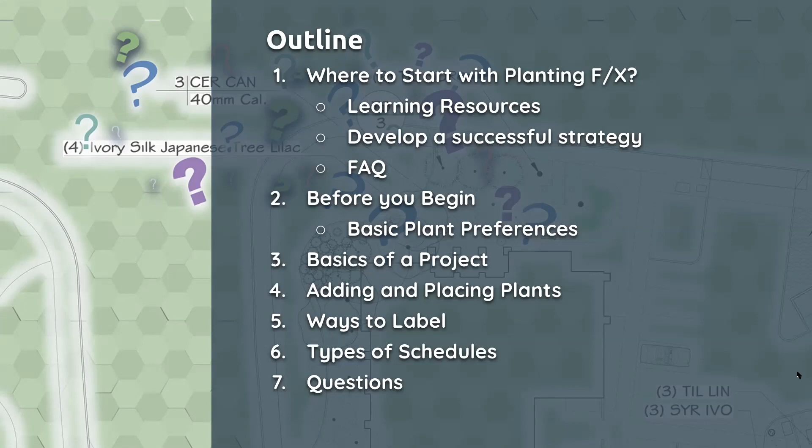So starting with how to learn more. I usually end my training sessions with this how-to-learn list, but today we're going to start with it instead. The best tool you have is knowing how to learn more than I can possibly tell you in an hour and a bit that we're going to be spending today. So the first one is webinars like this one. You might have gotten to hear this live through the Zoom link, but if you're looking for other webinars, you would go on our website.

Up at the top right, you'll see Resources, Videos, Webinars, and that will bring you to this page where at the top you can see the next live webinar you can register for and check what date that's going to happen. But you can also see all of the recordings down here.

You can filter by topic, like planting, as I have over here. You can also search for different things, like tree remediation, and it will pop up with this webinar.

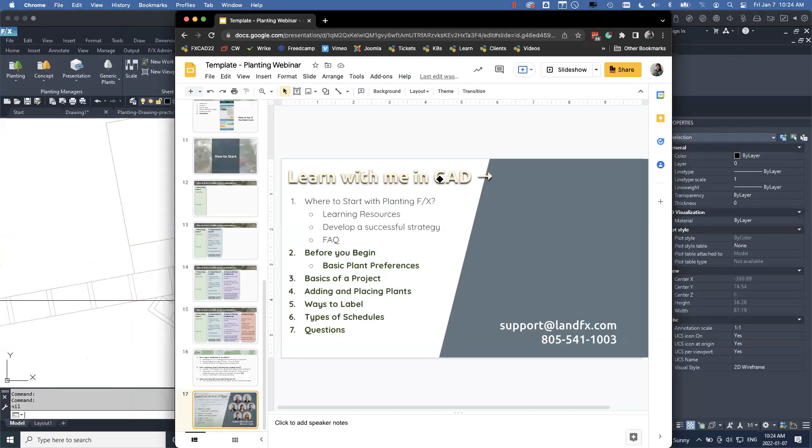So if I just go out of here and go to our website — here's our homepage, landfx.com. If I go to Resources, Videos, Webinars, here we go, and I go over to AutoCAD and FXCAD.

I can see right here, I have CAD for Beginners 1, 2, and 3. If you've never touched AutoCAD, start here. If you have some experience in AutoCAD, maybe go through those liner notes that Jason types up and see where you probably should start in this series. But it never hurts to start from one and relearn your bad habits into good habits.

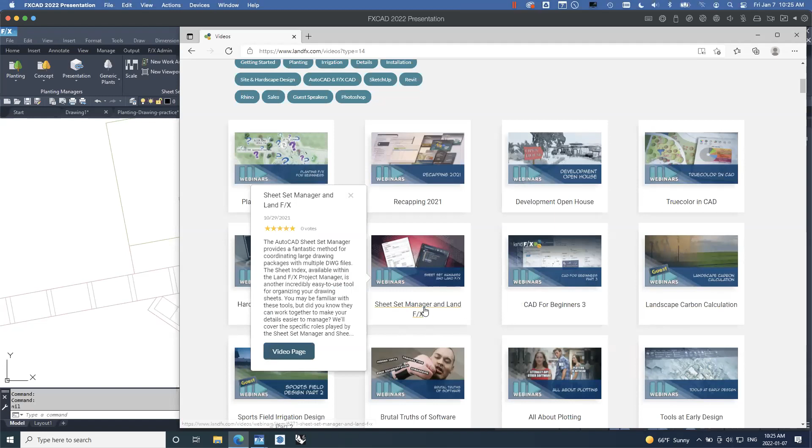Another one I really like — we've got the all about plotting here, as well as drawing setup using an image. A lot of people ask how do I use a Google Earth image or a PDF — this is where you want to go. Also, one of our recent webinars was the Sheet Set Manager and Land F/X. If you're watching this later, you can always search in here for Sheet Set Manager.

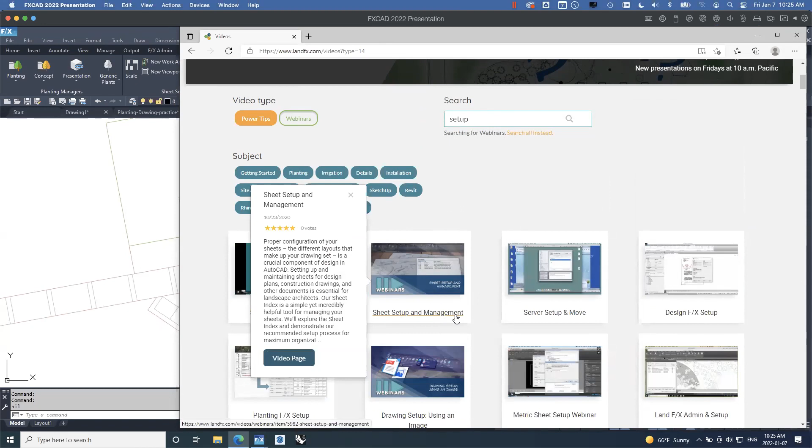This is Sheet Set Manager, but I actually like, if I go to Setup and search Setup, this sheet setup and management is an easier method of just setting up a title block and the drawing setup that I'm using today without going into the more advanced Sheet Set Manager. So I would actually watch this first before the Sheet Set Manager if you're new to this.

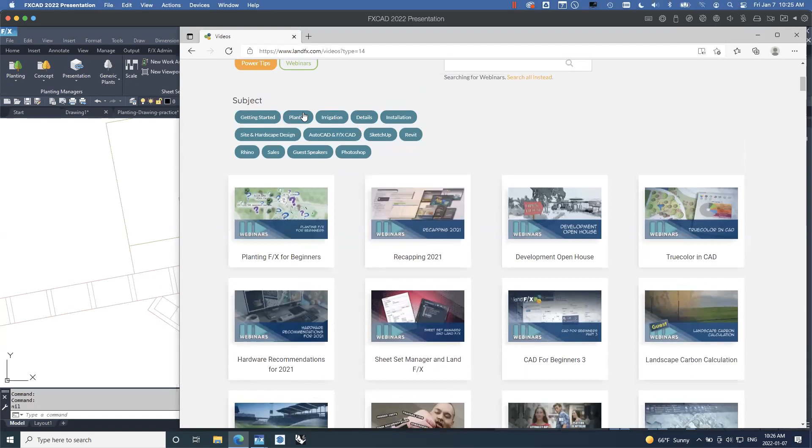The last one I really like, if I just go back to webinars, is just webinars. It was migrating existing plan into Land F/X. Actually, I think it was under planting. There it is, migrate an existing plan into Land F/X. So this is one method if you kind of want to start with a drawing that already has a lot of blocks in it, that you're halfway through or you're redoing an old plan. This is the method that you're going to want to follow. It's going to be really quick and you can replace all those old blocks with smart blocks.

But instead today, we are going to just be starting from scratch. Just a blank drawing, no plants placed at all. So kind of like the workflow you'd be doing for a new project and setting up your preferences on the go. So that's what we're doing.

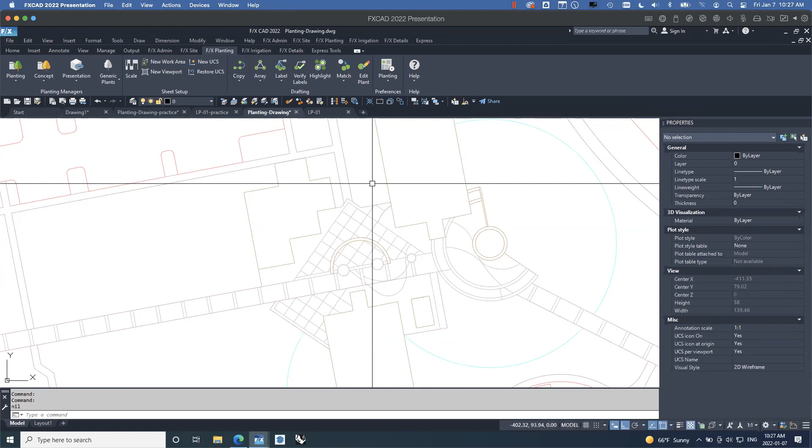Segue into CAD. So let's look at our ribbons. If you've installed Land F/X and Planting F/X correctly, you're going to be seeing all these ribbons. If you just have Planting F/X, you don't need this Irrigation F/X ribbon. If you have Irrigation F/X as a license type, it does include the planting tools as well. So you will have all of these and that will be fine.

We are going to start over here on the F/X Admin ribbon, and we're going to be looking at our preferences. So our preferences are actually in two places. They're over here, planting preferences and plant size preferences. And we also have them over here on the F/X Planting ribbon. If I drop down over here, I have planting preferences and plant sizes preferences.

I also have save plant blocks. So that's kind of a little heads up that yes, you can save your own plant blocks. But I'm going to be focusing on this one. Let's go to planting preferences. If you're brand new to Planting F/X, this is where you're going to want to open up first. And we are going to set a few, change a few defaults to your preferred style, even before you start a project.

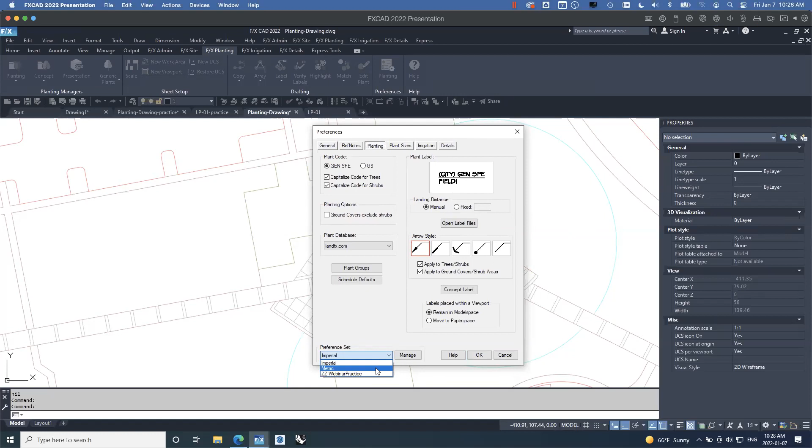First, you need to choose between imperial or metric. I have one over here where I was kind of practicing for this webinar, but if you've installed from scratch, you will just see imperial and metric down here right now. We are going to be improving this, but as of today, this is how it looks. And you need to choose between them. Today, I'm going to be doing a metric drawing, but everything that I'm going to be doing today is easily done in imperial inches, architectural inches, or decimal feet, no problem. You would choose imperial. I'm going to choose metric.

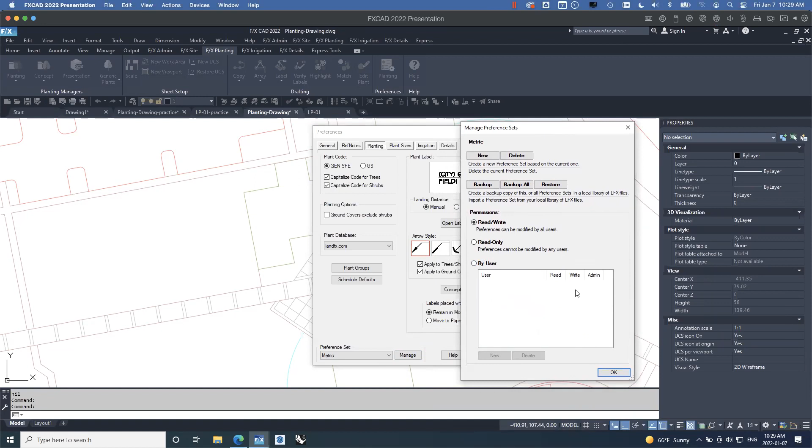And before I start changing things, I actually want to do something a little bit awesome. I'm going to click manage. You can see the manage preference set. You can see where I can set things by user with admin permissions to change things if you need to. Be careful with that. Do try and set 2 admins just in case somebody's computer blows up. It's set to the computer, but I'm actually going to just click new on here. And what this is going to do is make a complete copy of this preference set under a new name.

And I'm going to name this as 00 so that it falls alphabetically first in the list. And then I am going to set this to your company name, maybe a short form of the company name, and preferences, keeping it kind of short. So maybe AMLA, Amanda Marin, LA. I like that name. Yep. Good morning, landscape architecture. And then I'm going to put prefs. There we go. Nice and short, to the point. Okay, this is my office's personalized, customized preference set now. And it pops up at the top of the list, so all new Land F/X projects are going to use it by default.

Now that I'm in here, I can start changing things. So the first thing I want to look at is plant code. I need to decide between 6 letters and 2 letters.

Really, it's personal preference. I can make a strong suggestion that you change your standard to 6 letters. I started in an office that did 2 to 3 letters for all of their plants, and when I moved them over to 6 letters when we started with Land F/X, oh man, did the city officials and contractors all say your plans are so easy to read. Because if it says ACE as the first 3 letters and it's pointing at a tree, it's a pretty big indicator it's an ACER. So it just meant less relying on flipping back and forth between the schedule and the plan for people trying to read it. That's the benefit of that.

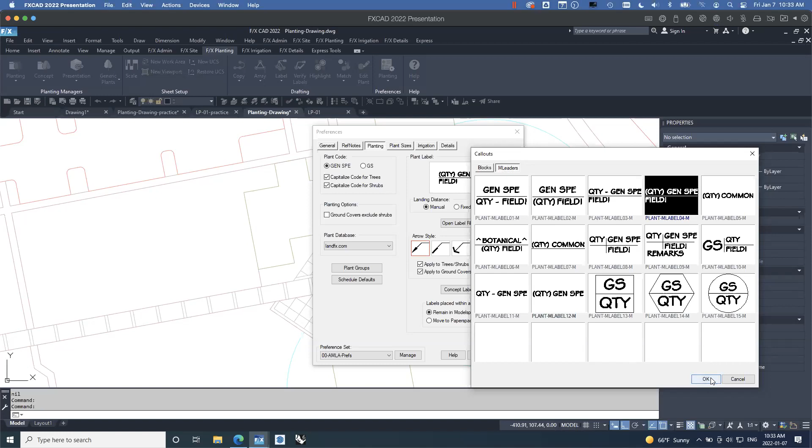You need to pick a landing distance. This is just if you click and label a plant, whether it's a fixed landing distance between the second point and the actual label, or if you manually pull it across. See what I mean? I prefer manual myself. You can choose an arrow style, whatever suits your fancy.

Concept label, honestly, I would edit that when you get into concept plans. You do want to have a look at these plant groups. I can open that up and see right here I have trees, and then it breaks it down into types of trees - these are like subcategories. We call them plant groups, and mostly it's a way for you to eventually filter your plants so that they separate themselves in a schedule. You'll see what I mean. There are different plant groups for each category of plant. You're going to see these categories around a lot. They are suggestions, so you want to go through all of these and maybe change them now. You can definitely change them and adjust them later as well. I'm going to say okay.

Leave schedule defaults until after you've done your first schedule, and basically everything else in here should be fine. You might want to choose between remaining in model space and paper space - that's just for labels. If you're doing our recommended method where I have my planting drawing in model space and my sheet in another drawing, you can't label through an XREF, so you will have to remain in model space and label here in the model space drawing. Keep that in mind.

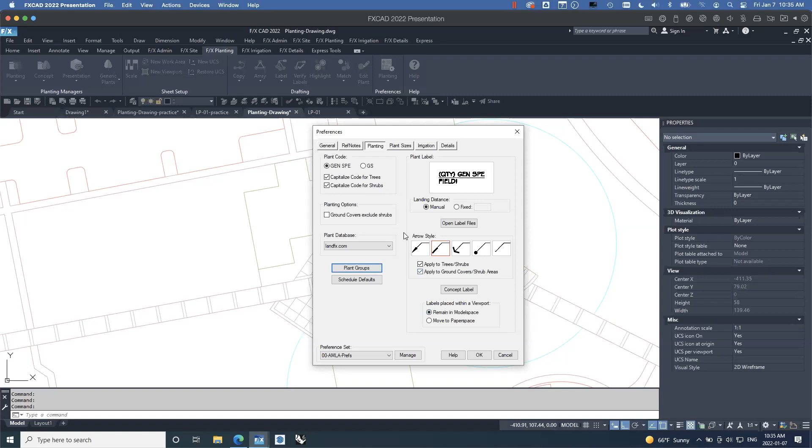Okay, next I want to go to plant sizes. Again, you can see trees, shrubs, shrub areas, ground covers - this is a common theme. Under here are the different available fields for when we assign data to plants, what kind of information we can assign to plants. You do want to go through these at the beginning and set them to how you want them. These are all completely editable. You don't need to stick with what we've put here as default. You can change container type to whatever you want.

You can also delete or add different entries in these. If I click down to this radio button, I can see all the different container types I have here. You can edit, delete, and add new ones. You can also add another column for even more information than we have by default, and this just leaves the door open for whatever you want.

I've seen people—one person recently asked if they could put weight in here because they do a lot of plans on rooftops. I've seen people use this for WUCOLS in California, which is a water use standard. I've seen fields for diameter at breast height, DBH, all of that.

So as you go through here, you'll notice, if I add that in and click new and say, oh, this tree is going to be 500 pounds at mature weight—if I click through to shrubs, I don't have that weight category. So you will need to drop down and add the category to each one of these because they're all different.

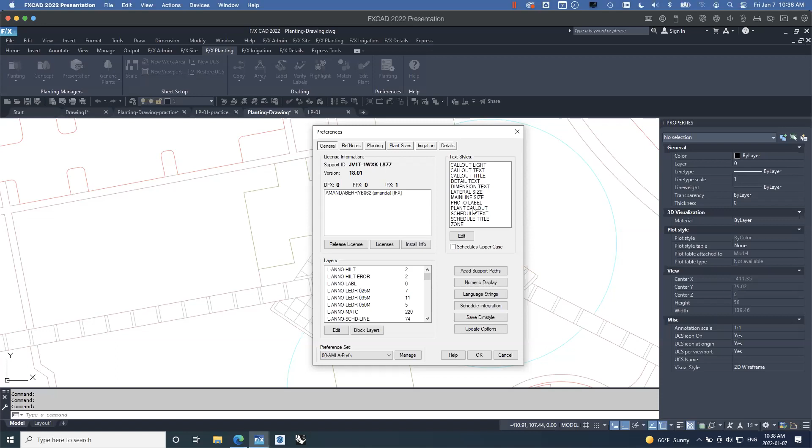The last thing we want to look at for preferences to set up is here in the general section. First, you want to go through and make sure the text styles match your font and size. So say if I go to plant callout, we're going to be using that a lot today, and edit it.

It's just going to ask for a scale. I'm going to set it to 1 to 100 for now, because I know that's what my plan is going to be. But if you're in a blank drawing, it won't matter what scale you set this to if you're just setting up preferences in a blank drawing.

By default, this is Stylus ITC Bold, which is a version of Stylus BT that is bold. But you can change this to Swiss 721. You can change it to Arial, whatever you want to use in your office.

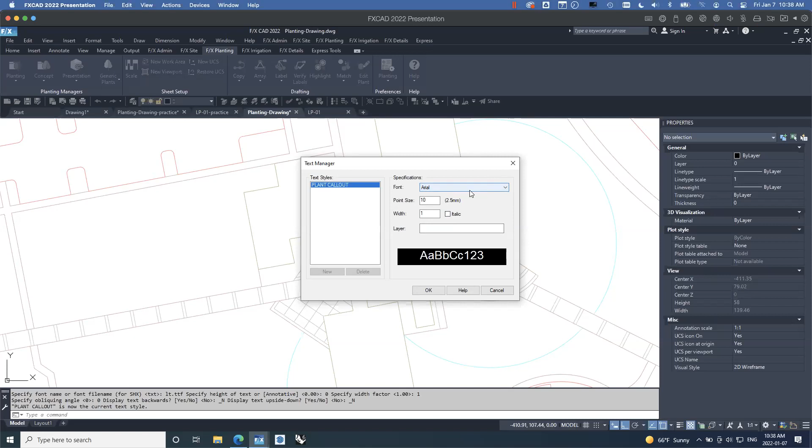Note of caution against using fonts that are not installed by default with AutoCAD, Windows, or Land F/X. There can be problems installing fonts and them actually getting background names different between two different computers. It could cause a problem in here. Be aware of that if you're having font issues with Land F/X. But Arial's a pretty safe choice.

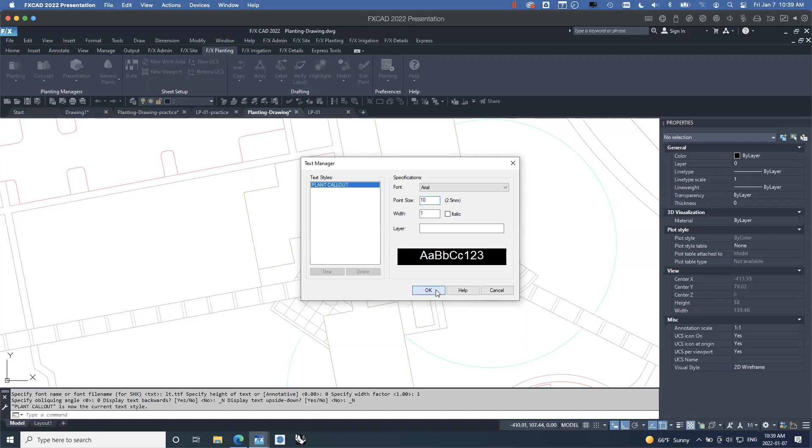Point size relates to, like in a Word document, how big it actually is. 10 is the default—please try not going below 8-point font, it becomes illegible. Okay, I'm going to stick with that. I've set my plant callouts to Arial.

You can go through all of these text styles and make sure the font's the right size. The next one you're going to want to go through is layers. I'm not going to go through how to do them exactly in here—it's a whole other webinar, and we have a great guide on our documentation on how to do it.

Keep in mind, this is for matching our layer colors and names to your standards—you need to edit them here in the layers list and also in the block layers list. The difference between the two is everything in the layers list is created on the fly by Land F/X. There are two ways Land F/X creates layers: on the fly, in which case it needs the layer name and the color, or by importing a block where the layer is already set up with a name and a color. In that case, you just have to change the color from one to the other. So that's it in a nutshell. If you need to change to match your office CTB, follow the guide, the whole worksheet for that.

Last thing you probably want to change is numeric display—that's just to change it to the units in your area. I'm going to leave it all as default for now, though, and I'm going to say OK.

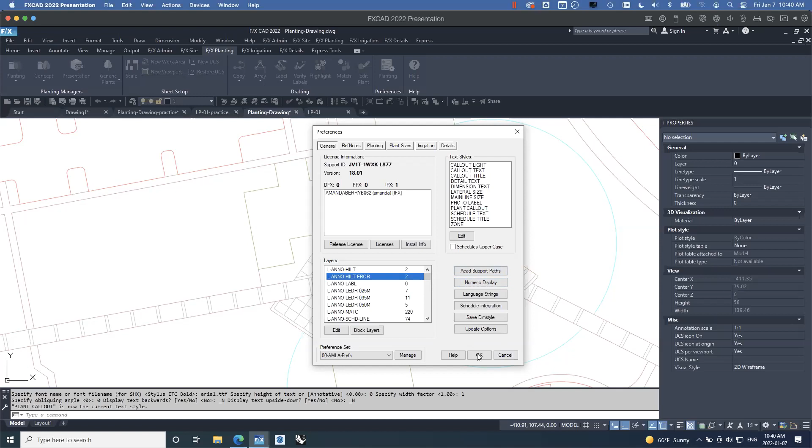Okay, so those are the main things you want to change at the beginning, and the rest we can kind of do on the fly. Let's see where I'm at.

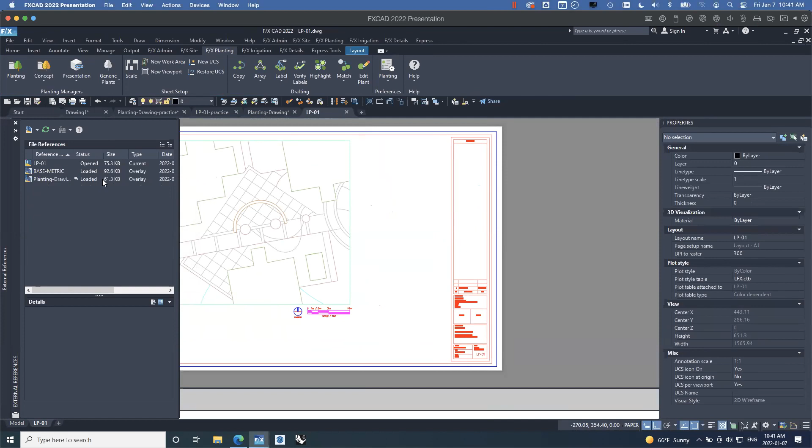Okay, so I've got my CAD plan set up here that I'm going to show you guys with. I've got an XREF on an XREF layer to my base file. I've got a planting drawing with my model space set up here, and I've got that XREF'd in. If I open up my XREF manager, there we go, I can see in this sheet I have my base file and my planting file both XREF'd in as overlays in here.

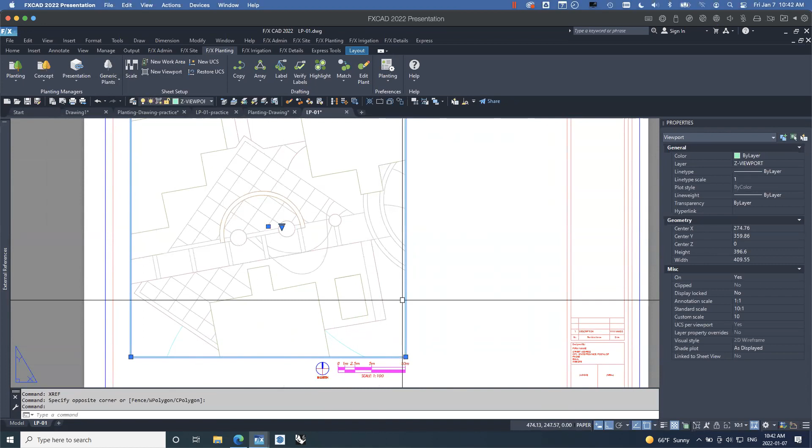And I've already figured out what scale this area where I'm doing my initial planting design is going to be. I personally used, to figure out the scale, our plot scale tool. I have a power tip that shows you how to use that, where you double click inside here, run the plot scale tool, and it will quickly size your viewport for you, and then you can lock it.

So I figured out my scale is going to be 1 to 100 for metric. I think that's around 1 inch equals 20 feet or 1 inch equals 10 feet, somewhere around there for imperial. And so with all of that set up, I need to go back to my workspace drawing.

And do the very first step I do for any LandFX plan, go to F/X Admin and to project list. And that opens up my project list. For you, if this is the first time you're doing this, this is going to be blank. There's going to be nothing in here. I just have a whole bunch from my trainings and other webinars already set up in here. So with yours being blank, you of course will have to click new to make a new project. The rule with projects is you have to make a new project for every design.

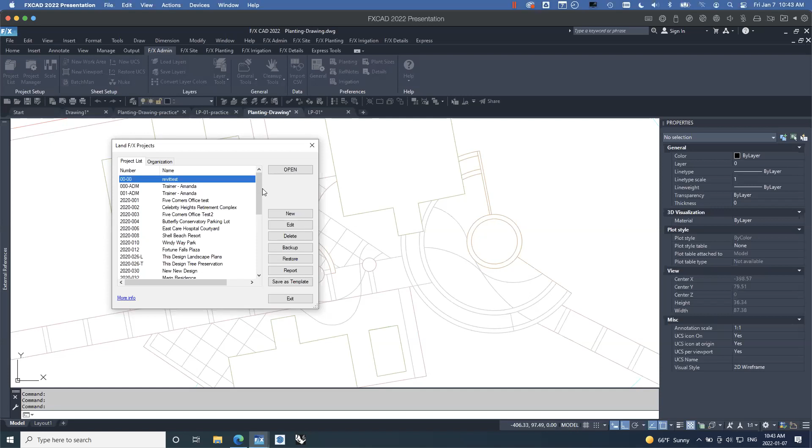You can use the same project between multiple DWG files of the same site design or planting design for the same client, but you need a different project for each new design. You can copy the plants between them, that's fine, but you want them to be copies so that you can edit the plant details in one design and it won't affect the plant details in the past design. That's very important. But I'm going to click new, and we're going to set up a project.

You need a project number and you need a project name. If you already number your design projects, maybe in your invoices, use that number right here. If you don't number them, here's a suggestion: I like using the current year and then just a counting up system. I like to start with 002, and then I go up by 2s so that I can shoehorn in a project that relates later on if I want to.

For name, I like putting in the address, so 777 SLO Road, and maybe the client, Marin. Short and to the point. I'm going to give you some advice on setting yourself up for success with LandFX and creating good habits early on. And I'm going to tell you to set a detail folder right now, even though we are not covering details in this webinar.

I'm going to click browse and just get you in the habit of this. I'm going to go to projects for a project specific detail folder. You have an option of how to organize this. We have a webinar and a power tip on suggestions. Just for now, hey, let's make a 2022 folder.

You can click new and say I'm creating a 2023 folder for next year. I'm just going to call it 2023 and code 2023, and that creates a folder. Whoops, it created it in there - that was a mistake. I need to actually highlight the projects folder and click new. There we go, 2023. You can learn through my mistakes mid-webinar. There we go, that creates a top level folder like that.

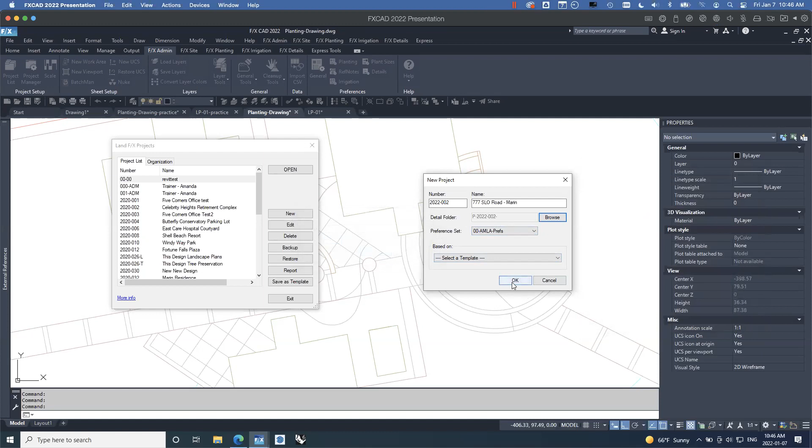That opens up the project manager, basically confirming all the details that I just created for that project, and we're good to go. I can click OK on this.

You can actually follow along with this even in a blank file if you want to. You don't have to have this XREF set up for the rest of this. So the first thing I want to do after I've done my project, and before I place any plants, is...

I want to set my scale. So like I said, I already figured it out. I set up a layout space, I figured out how big my viewport was going to be scale wise. I need to set that as a scale here in LandFX as a plot scale.

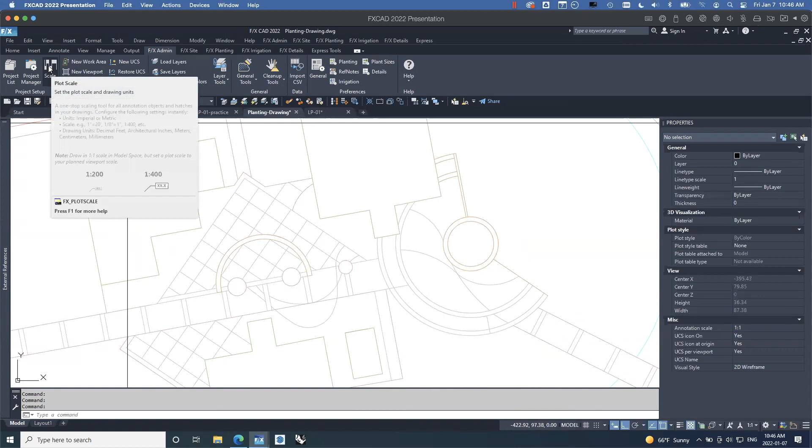LandFX uses this plot scale in order to figure out how big that plant callout text should be. So we told it to be 10-point font. It needs to know what scale it's at, so it knows how big 10-point font is going to be in model space or in paper space. That's essentially what it's doing.

So again, you can click imperial and do a decimal feet or architectural inches scale. Again, we're going to be doing metric, and I already know that my viewport is 1 to 100. And my drawing units in this model space are meters. That's all very important.

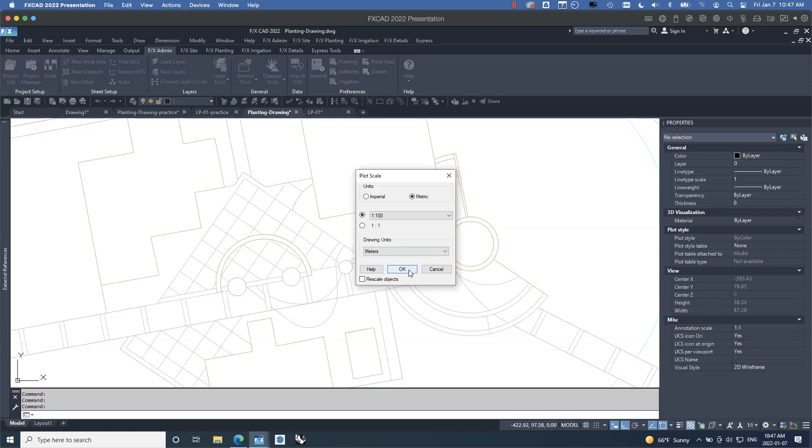So step 1, create a project. Step 2, set the scale. Step 3, add a plant.

Let's go over here to F/X Planting again, this ribbon up here. I'm going to go all the way over here to the left-hand side. I can drop this down or just click on it. The very first option is going to be the plant manager. That's what we're after.

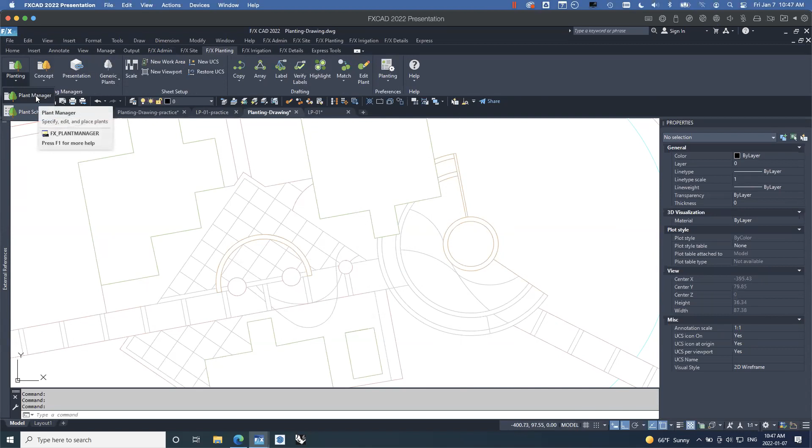That opens up this nice little handy window. You can again see the categories: trees, shrubs, shrubberies, and ground covers. These are suggestions, not rules. You can put a tree species in shrub areas, whatever you want. Just manage your plant groups accordingly.

I'm going to click new to just add a plant real quick. Our first plant. So this is what your window is going to look like right out of the box. You can see a lot of options going over here on how to find things.

We have 43,000 and counting. We're probably up to 44 now. And basically I can search through this. Let's go ahead and search maybe Pinus. That search is going to bring me right to pines.

Now I have a lot in here. Maybe I want to filter by my area, so I can go to filters. And I can filter by a hardiness zone, 8A or 8B maybe, and it's telling me how many plants there are in our system that match that filter. I can apply filters.

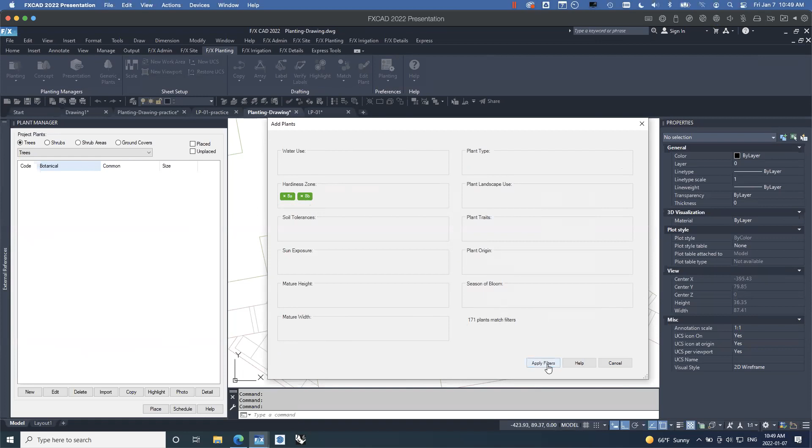And there we go, here are all the pines that match that filter. So I'm going to go to... let's see, I'm going to go to nigra, maybe. And these are all the Austrian pines that match that. So let's go with Oregon. Teardrop sounds good. I'm going to add that to the project, and that gets added to the project.

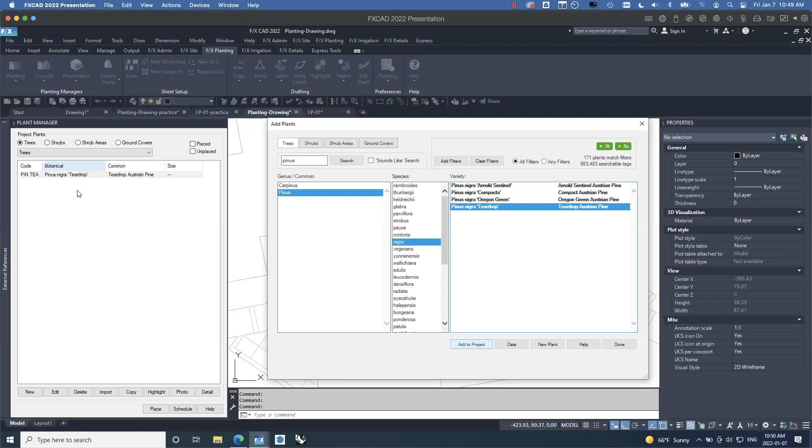Now I can keep going here, keep searching for all of my trees and keep adding them in, and they get added into this plant manager. I can also clear my filters, clear my search, delete, and go over to shrub areas. You see that switching over the plant manager too. Clear the filters.

And let's search for a bottle brush plant. Oh, not V. C-A-L-L, I think. I'm even just doing C-A-L-L, and it kind of brings me down to all the C-A-L-L genus and common names, and I can pick out the one that I wanted.

I wanted citrinus. There we go. And I wanted the Endeavor citrinus. So you can see we have a lot of different varieties going on in here, and basically everything in here has been suggested by a landscape architect at some point who was using our software.

And if they don't see the variety that they're looking for, you can add new plant, and you can go ahead and add your very own variety in here. So Amanda, the Amanda variety, this is the Amanda bottle brush. I'm going to say okay.

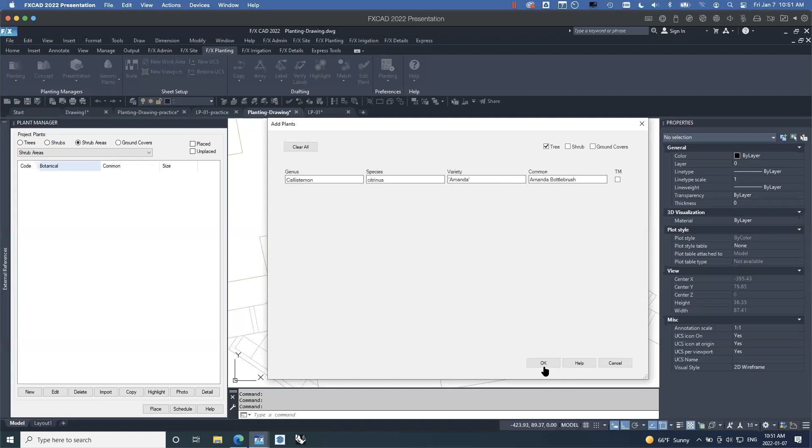And that will filter back to it. You can see that it's added that for me right away for me to add to my project. There we go, it's added to the project. But what that also does is it just pings us, and somebody in our team goes through and makes sure that's a real plant and then adds it to this whole list for everybody else. So Molly's going to look at this, and she gets so many of these plants from me during all my trainings, she's immediately going to throw it in the trash because it's not a real plant.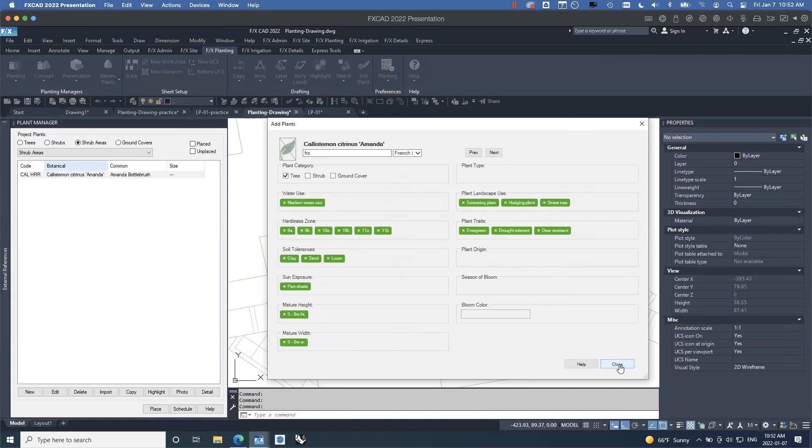But while you do that, I do recommend clicking this data button and going ahead and refining this data, maybe adding a photo as you go. So we are kind of wiki-basing our data to quickly fill out all of these filters for all of these plants. You get badges for doing more of them.

I'm just going to close this and say done and kind of go with this for now. Okay, so we have added our plants. Now we've got to edit these plants. So if I edit this Amanda bottle brush and click edit in the plant manager, all of this information at this point is still editable. So if I want to completely change the botanical and common name and code at this point, different than it is in the master project list, you can do that here.

And then you can import all of this information you set up using this button into future projects as copies. It's great, so I can go ahead and set up everything here as if I'm going to use this plant again in the future as well. So maybe this bottle brush is about 25 bucks to supply in place. It's a 2-gallon pot. Again, I don't have that third column here because I didn't set it up in my preferences for shrub areas, I only did it for trees.

I can set a spacing for my shrub areas. Maybe for this one, I'll put in 700 millimeters, which is a little over 2 to 3 feet. And then I want to set a symbol, so I'm going to click on this symbol. I have all of these options for line types for a shrub area.

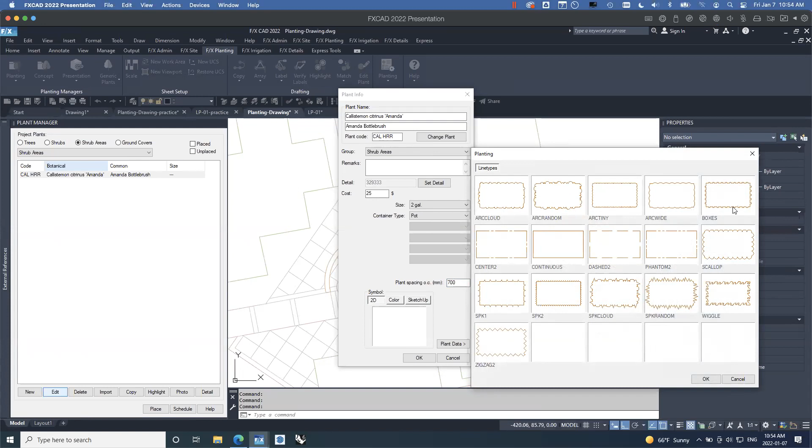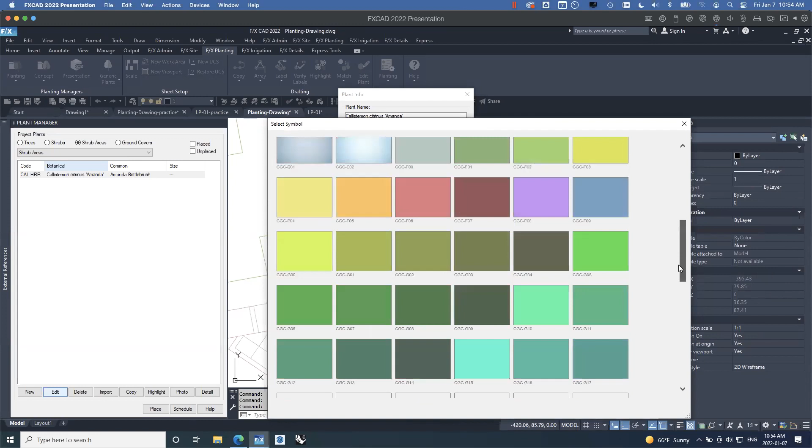I'm going to choose this one. And then it goes over to hatches because this is an area that it's calculating the spacing of these plants. So I can click on that hatch, there's lots available. I can set up a color right away, so let's go with a nice green color. I can do a gradient or I can do a solid. And then it's going to ask me for that hatch again, I can change the hatch here too. But that's basically this plant setup.

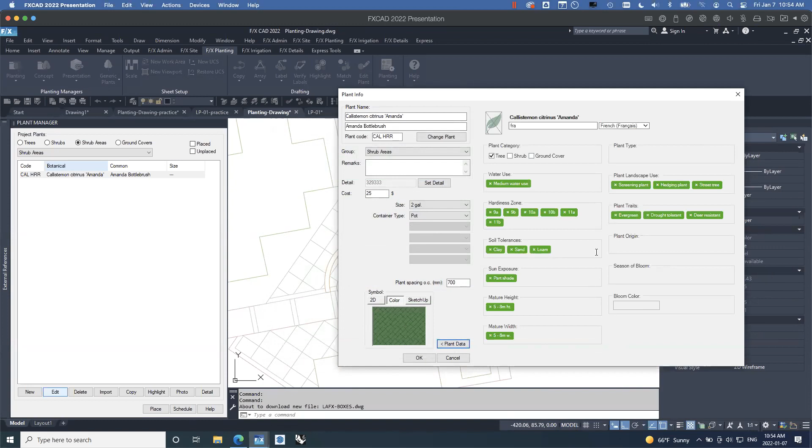I can also have a look at the plant data at this point. These are all really handy additional data points beyond the fields that you can also include in the schedule later on. I'm going to say okay, and that's set up. Let's do that again for the tree.

And you can see how it's different, so I can edit that one. Again, all editable - maybe this one's 350. You can see that additional field that I set up here. I'm going to say this one's maybe 150 centimeter height, that is about 5 feet.

Container type, maybe this one is a wire basket or bare root, and I can choose that weight, or I can click add new and say this one's going to be 650 pounds. There we go, that one's added. It also adds it to the standards as well, if you are allowed to edit the preferences.

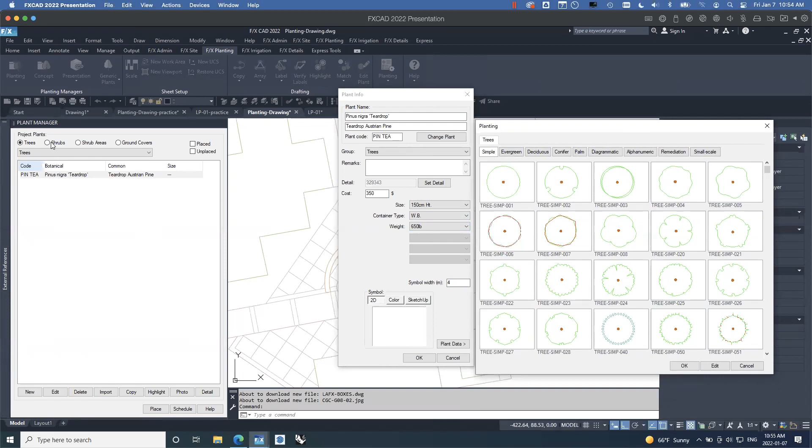I can change the symbol width of the pine. Maybe 6 meters is quite big for a pine, probably it's going to be more like 4 meters or 12 feet. Symbol, I click on this, I get a whole bunch of different symbols. The symbols are different between trees and shrubs. They're the same between shrub areas and ground covers, it's just ground covers you don't choose that outline.

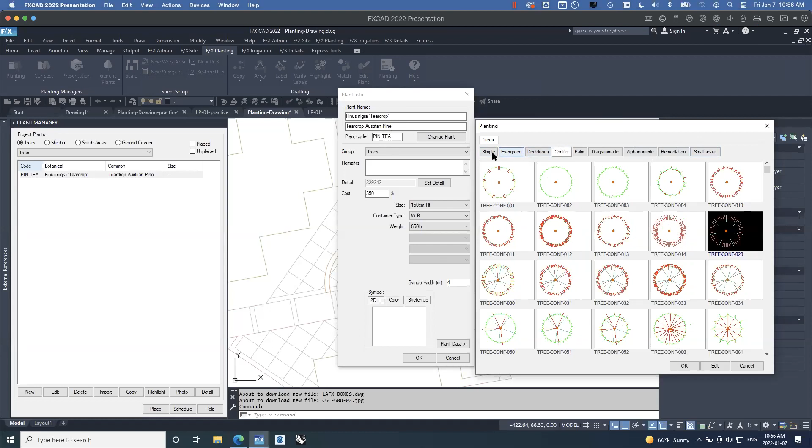So for trees, I have lots of options to choose from: evergreen, deciduous. Obviously for a pine, I'm probably going to go conifer, maybe I go for something like this. You are not limited by these, you're not even limited by these folders. You can add your own company folder to the beginning here if you want to bring everybody to that. So I just set that, set a color symbol - again, different color symbols, you can see it all downloading right now.

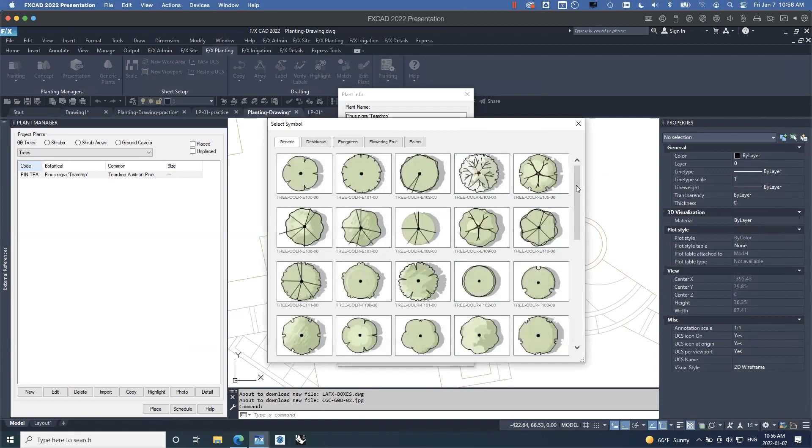There we go. I'm going to go to evergreen, just improve this to sort it a little bit more. Maybe I'll go with that color. Great, I'm going to leave it at that. That gives you a good idea of the difference between the two.

Now we're going to go to placing. So I'm going to grab this one. I'm going to place. And we are going to go a little bit beyond an hour today. We did plan on that.

So as I'm placing it, I can just kind of click, or I can place 3 or 7 or 10 all at once. And I can cycle between all the different versions, patterns of 10. I can make this wider. I can make it smaller. I can make it dance.

And you're probably wondering what I'm doing. Basically, when in doubt on any Land F/X command, you want to look at the command line—it's telling you what to do. It's saying choose a position or tap K to look at your shortcut keyboard commands. So I tapped K, and you can see what I was doing. I was tapping the 3 key, then the 7 key, then the 0 key for 10, and I kept tapping 0 to get all those different patterns. I tapped W for wider spacing, S for smaller spacing. I have a lot of other controls in here that you can play around with.

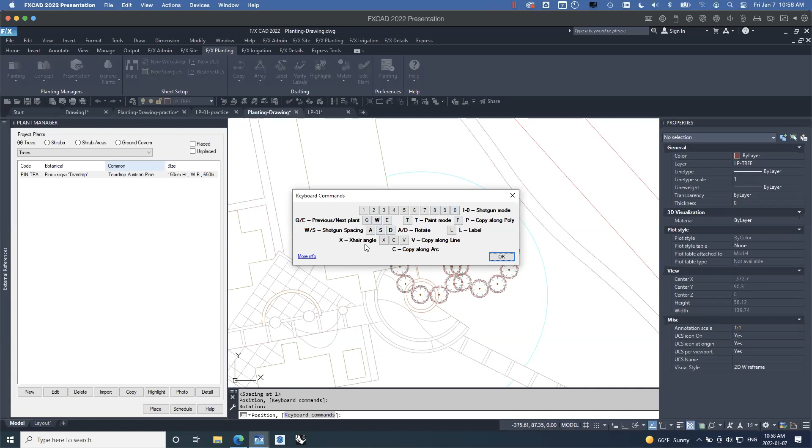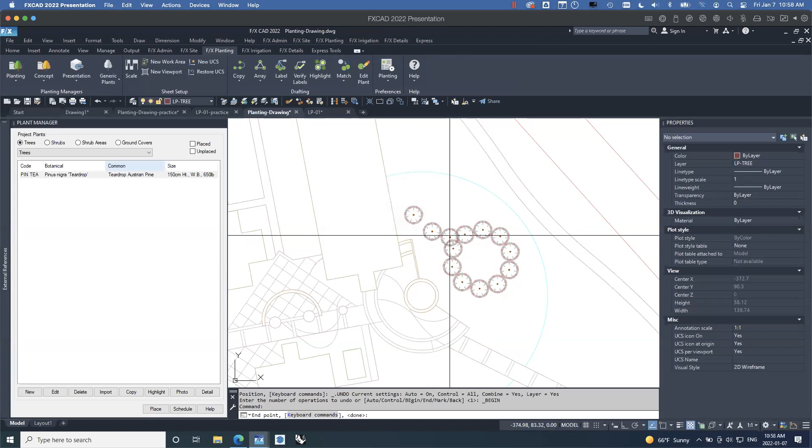We have a great power tip that goes into this in more detail, but let's look at copy along line, arc, and polyline. So I'm going to tap 1 to go back to 1. I'm going to place 1 down, and I'm going to tap V for copy along a line. Then I can change the spacing by tapping 1 and saying I want this every 6 meters exact spacing. Bam, 6 meters exact spacing.

I can tap C, pick a midpoint, and copy that along an arc like that. Midpoint, arc. All right.

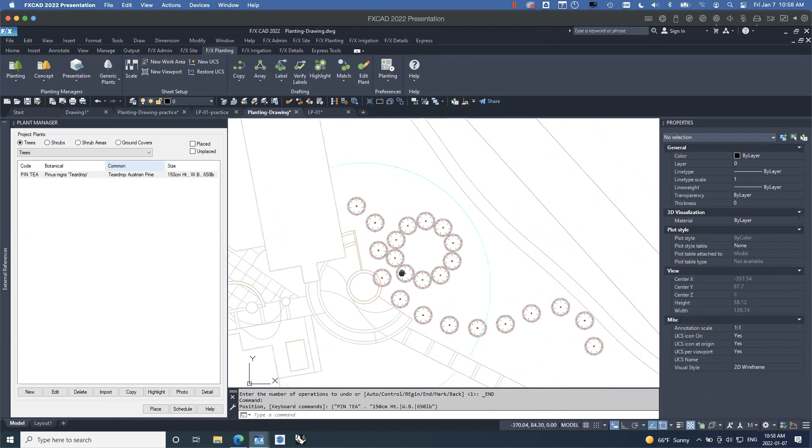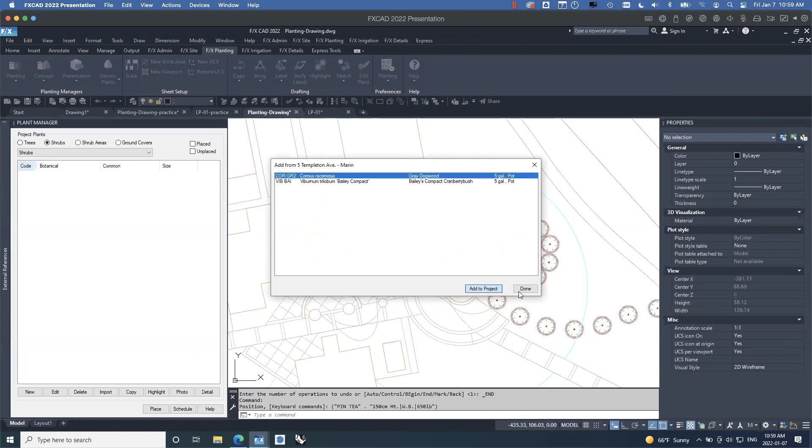Now I'm going to show you really a quick trick along here—or actually maybe in here. I'm going to go to shrubs. I have no shrubs in here. Here's that import tool we talked about. I'm going to go to my test project—maybe this is the first project you ever did. It shows me the shrubs that I used in that project and set up. I click add to project, and done—I get that shrub that I set up in a previous project.

So that's the power that you're going to eventually get here. Everything's set up with the cost. I've already set up all the symbols, so I can go straight to placing this one. So maybe I place this one.

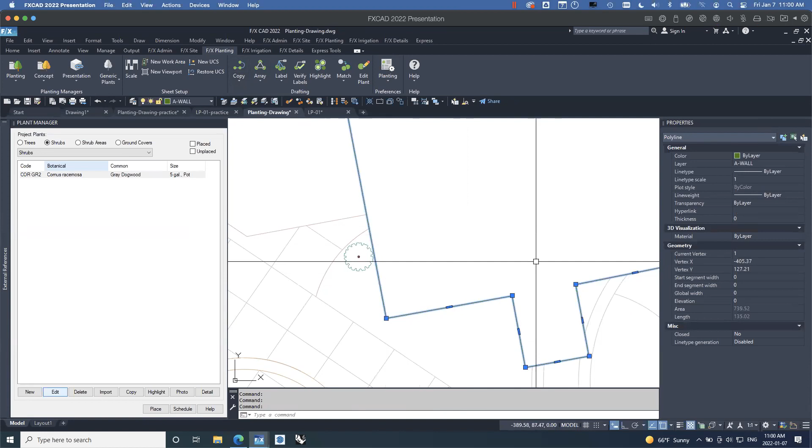I get this guide, and I have some of the same controls as before. With the other one, I can choose the spacing exactly if I want to. I'm right-clicking to end, and that guideline goes away. Then I can right-click again, and that ends the command, and I've got all those shrubs nicely placed along a line.

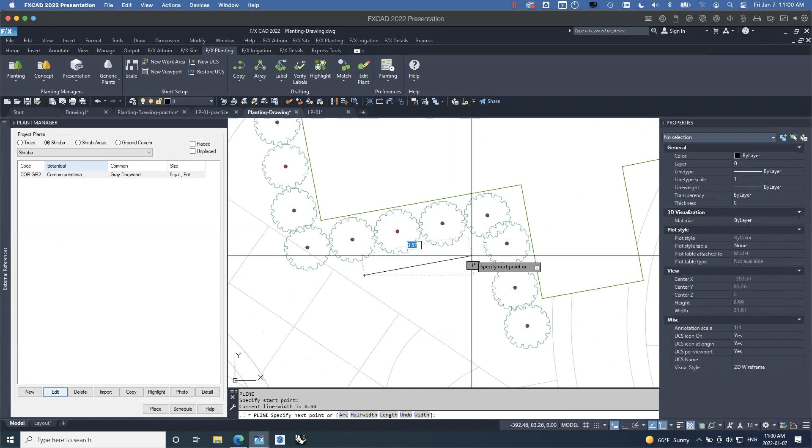Let's move along. So maybe I want to place a shrub area. I had those shrub areas in here. So I'm going to draw this little area right in here, close it. And I can go to that shrub area that I had, and I can click place.

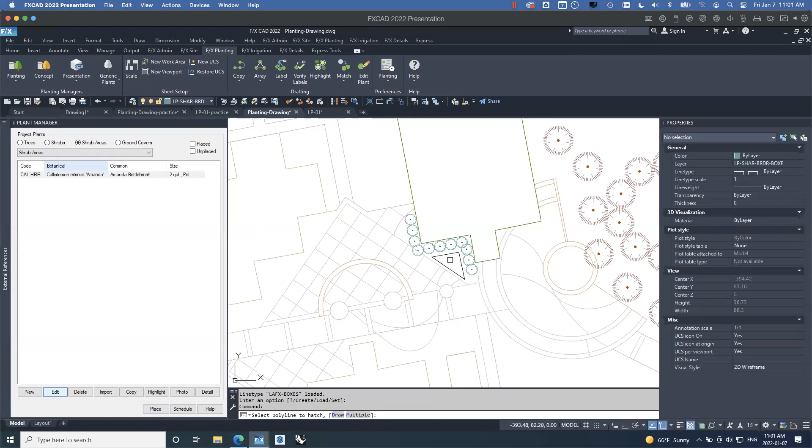And it's going to ask me to select a polyline to hatch. You can also draw a polyline on the fly, or you can pick multiple if you want an island in between. I click that polyline, and it creates that hatch at an appropriate scale for the scale I set up here, with my line type on it as well. And that line type's even on its own layer.

In fact, everything that I'm doing is on its own layer, on an appropriate layer as I go along. I haven't been changing off of layer 0 as I've been drawing, which is usually a bad thing, but it's not with Land F/X. These are all placed individually, so I can go in here and fine tune as well if I need to.

Now let's label. Actually, before labeling, really quick, let's look at some other tools up here.

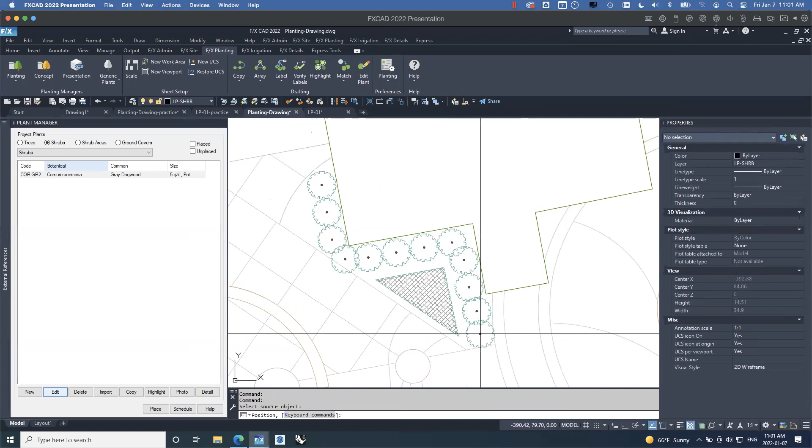I can match plant. So I can grab this one, grab that plant, and make a copy. You want to do this instead of the regular copy command. You want to use that match plant.

I can also match properties. If I drop this down, I see match plant properties. I can click it, click that, and click that, and it changes it into that shrub completely, not just a block. If I use this tool, edit plant, I can click on that shrub and see that it totally changed the block to completely different plant info.

This is the great part. I haven't even started labeling, but I've placed all these blocks. If I forget what plant I've placed down here before I start labeling, I can use edit plant and figure out what it is.

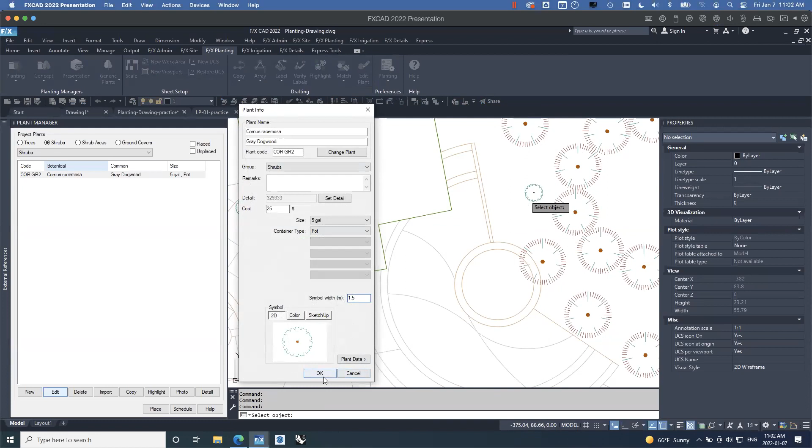The last one, highlight, is really helpful if you want to highlight where all of those shrubs are or all of these trees are in your plan. Lots of different ways to use highlight. I'm going to run highlight again and right click to get rid of that highlight.

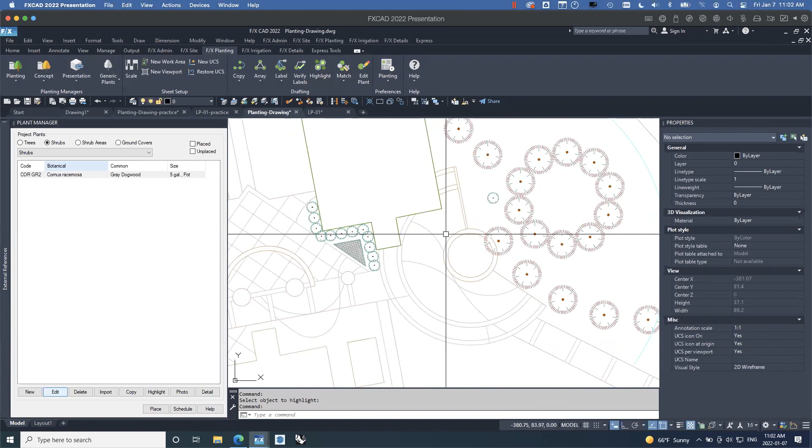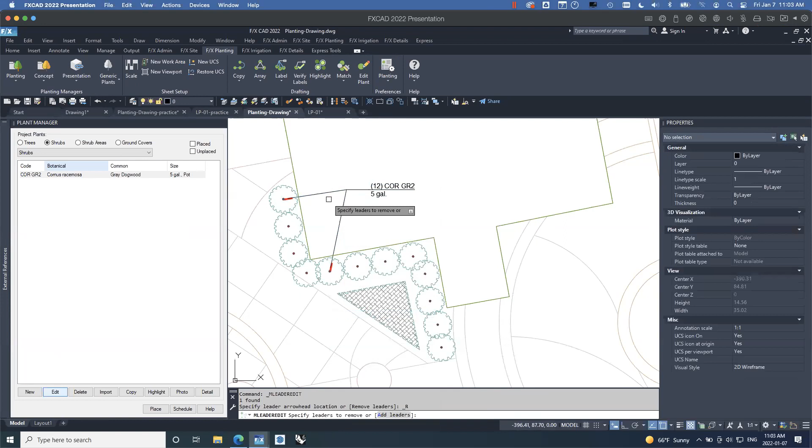I can place additional leaders on here if I want to. This is an actual M leader now. So I can go here, right click, and remove leaders if I want to. It totally counts those up.

I also have options like I can do different label styles. I'll just show you connecting arc as an example. Click one plant, click the next plant, click a midpoint for the arc, it creates that arc. Right click and place the label. And these labels are now placed at the correct scale for that 1 to 100 scale.

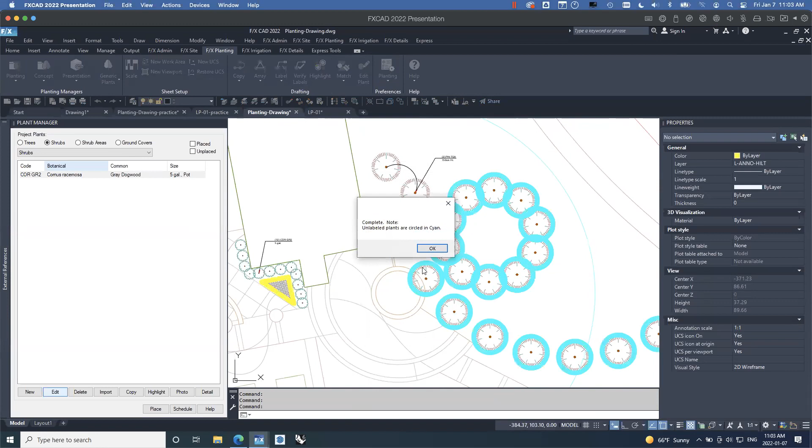Now, if I've kind of labeled everything on my plan, I might want to check that I've labeled everything correctly. I'm going to go verify labels. And it's telling me unlabeled plants are circled in cyan. So my shrub area over here is not labeled.

So I can grab a single label and label that one. I can grab a single label and label this shrub over here. And I can grab a group label and label all of these. I'm just going to grab all of them.

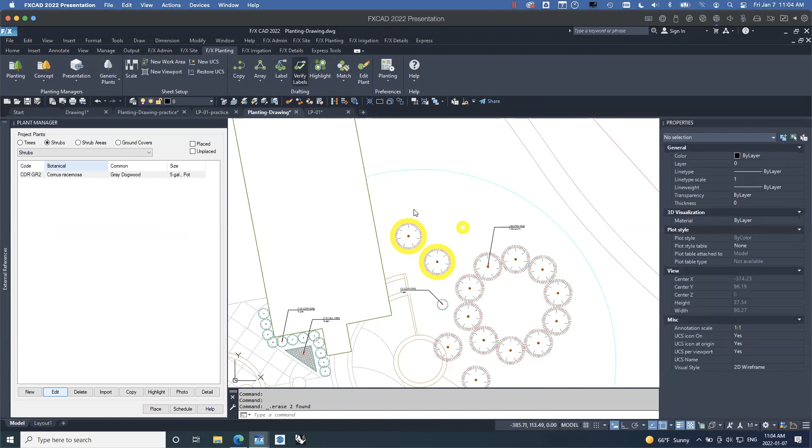And if I run verify labels again, it's like, hey, you didn't quite get it. You double labeled these, so I can delete that label. And finally, eventually get to the point where everything's labeled correctly. So double check your work that way.

Once you have, one thing I did want to mention, highlight. If you highlight a label, it will tell you which ones it's labeling specifically. It works with hatches as well. I right-clicked to end that command.

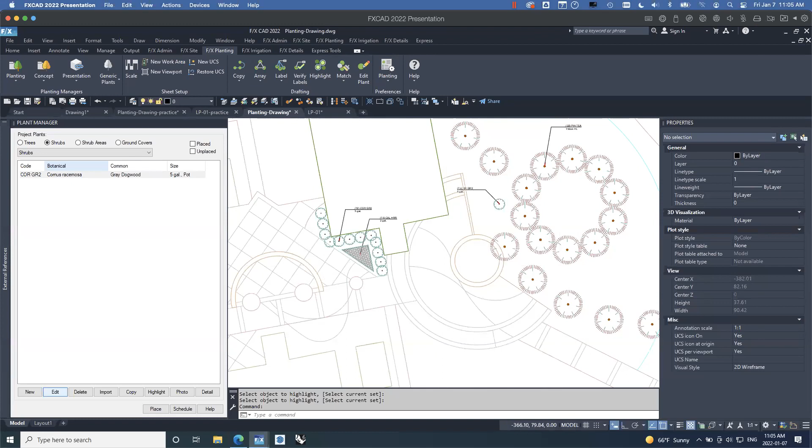Now, did want to show schedules and color render. So for schedule, I'm going to save this drawing. Now that I've assigned it to a project, I'm going to go to this sheet, and I'm in a different drawing. I need to assign it to the same project.

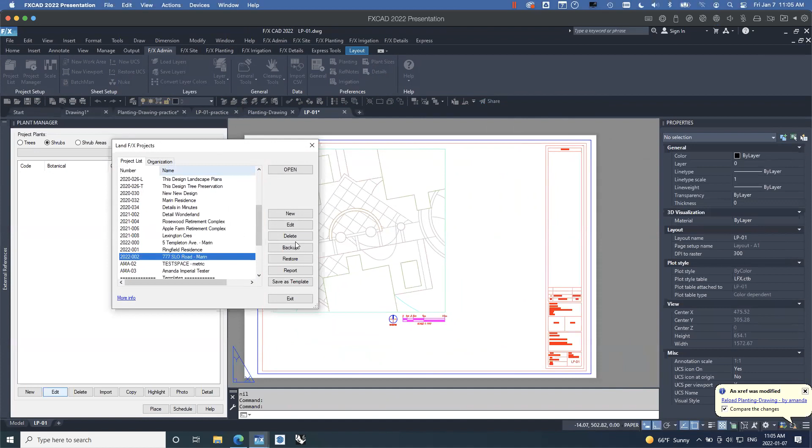So I'm going to click project list, and I'm going to find that project in my list. There it is, and I'm going to say open instead of new. I want the same project between the two drawings. Great, it's the same project. I want to reload my XREF. Great, and now I can run a schedule including XREFs.

So I'm going to go to schedule down here. It's also up here in the F/X Planting ribbon, plant schedule. It's the same tool. By default, you might want to check out how it looks if you just go with the total defaults, and then go through all of these options to change them around, like maybe a table style, or include cost, or include symbols if you want. Include concept plants if you get to that. Change what kind of columns there are for the botanical and common name. I'm going to leave the defaults and click OK.

Asking for the upper left corner, I'm going to click this down, see how big it gets. So it's a little bit big. I might want to figure out a slightly different standard, but it's a block, so I can kind of move it.

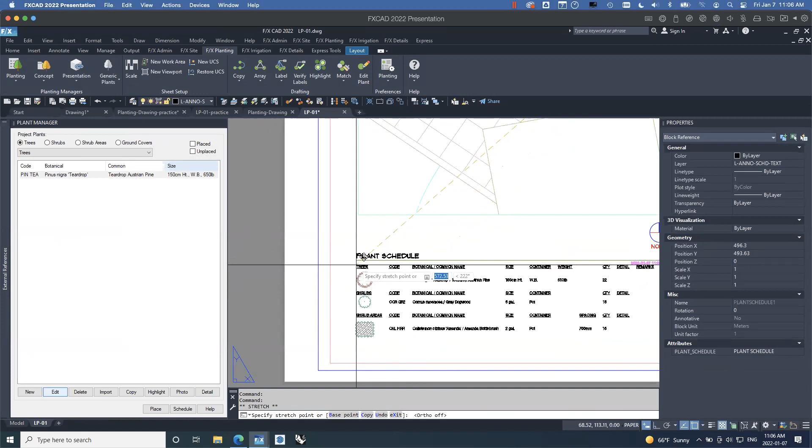I can move it down here where it fits a little better. You can see all of those different fields are now columns over here. It's counted up all the quantities. Just to make sure you saw that, I'm going to say no to look at the options again. I included XREFs, so that's why it's including all these quantities for the plants that are actually in an XREF.

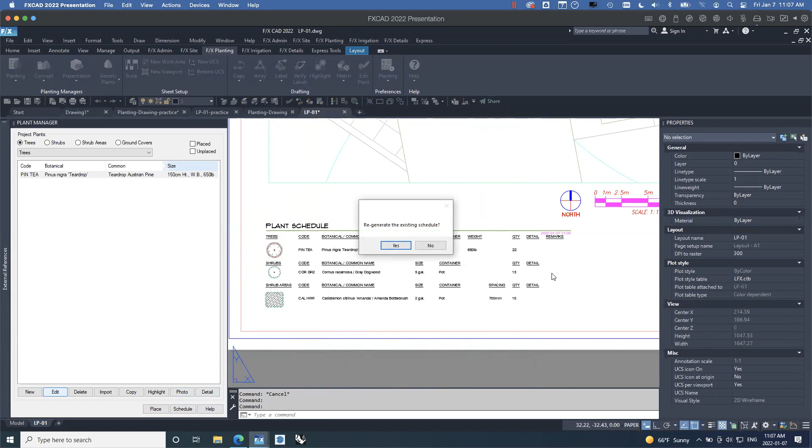Now I can go ahead, delete things, update it, regenerate the schedule. You saw when I ran the schedule tool, it asked to regenerate. You click yes, and it will update based on all the information you've changed. So you can edit the information on plants, delete plants, add plants, and this schedule will update. This is a non-plot timestamp so you can see when it was updated.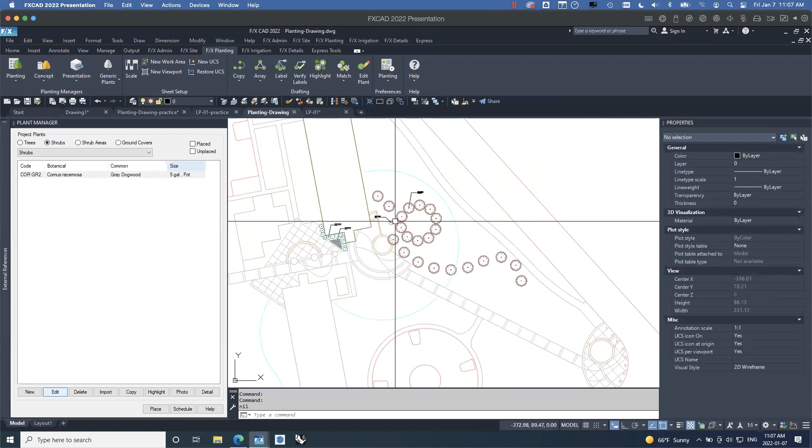So those are the basics for your first project, and then maybe you go a little bit further on your first project and do something you never really could do in a second.

Go to presentation, go to color render, and I already set up all those colors before as I was going on the go. So I'm just going to click on it, and it's going to swap those all out with their color versions.

So guys, in like 20 minutes on your first project, you can have a color rendering. You can take this over to Photoshop, make it even better, and save a lot of time in Photoshop that way.

But yeah, I think this is a great time to then look at some questions. This is basically it on the basics, but hopefully you get the idea of how to start with your first project in Land F/X, customize some of the main things first, and then just do the rest on the go.

That's my favorite strategy. Just click that add new, go in later as you hit a wall, and then go into your preferences and make the adjustments as you go.

Let's see, we put some time away for questions. Jer, what do we got?

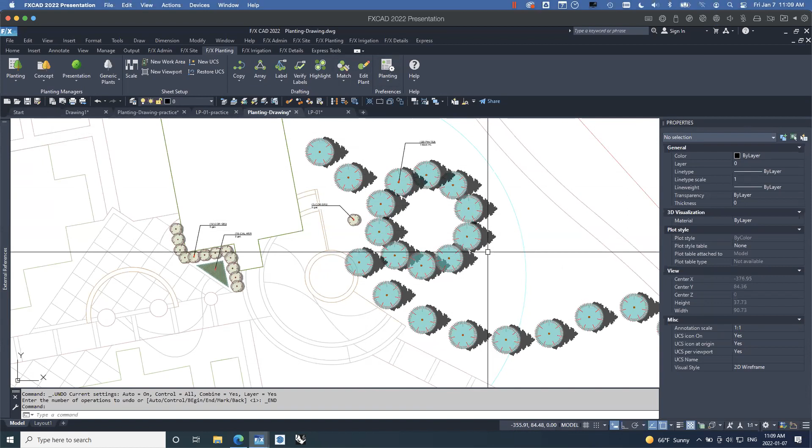Absolutely. For anyone, I was able to type everyone an answer, and I just wanted to say it was kind of a slew of questions. We got a lot of questions, and I was amazed that literally every single answer is a link to either a documentation article, a power tip, or a webinar. Every single question. And really that is the best thing to say, because we could sit here all day and you guys could type a question to us and we could then send you the link to a power tip video. But you might want to cut out the middleman and just go to the website and search for these questions yourself. But know that in the future, when you are struggling on something, pretty much anything you search for, you're going to find that we have that answer, usually as a nice polished little power tip video, which is really slick.

I wouldn't even know really where to start with which of these we necessarily need to backtrack on. But just asking about why XREF the planting plan into a sheet file. How do you save custom blocks in? How do you change the label style?

All of course these standard questions that we get all over, because as you can imagine, so many of these different questions, and you can see there's still a couple more coming into the chat. We're gonna have to hang around a little bit after the recording to answer some of these questions. So I'm not sure what you're up to, how much longer you want to go, but if you want to maybe show changing the label style, or in this last one that just popped in, can you arrange plant symbols automatically within a shape?

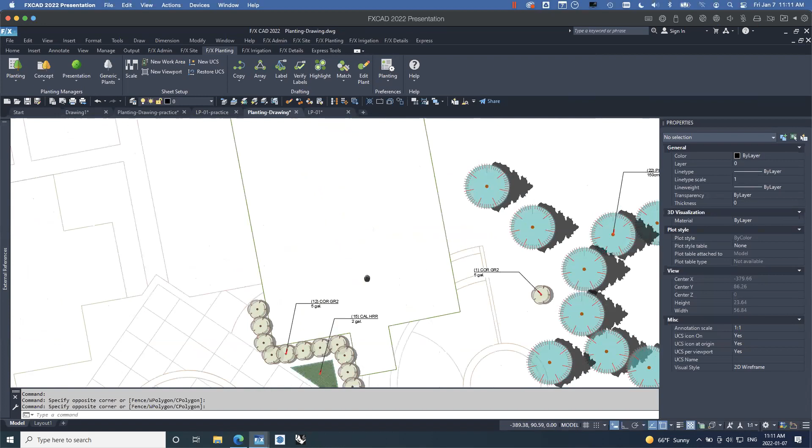The problem with that, Isabel, in case you're wondering, is just you have to fill a kidney bean shaped area with shrub symbols. To do it quote unquote perfectly, which is what we demand, is an incredible amount of math, and we just have not been happy with our prototypes of doing it. Certainly to do two things perfectly, but also quickly.

There's code I've seen, real sample code, typical in computer science classes: fill this area with jelly beans, as efficiently as possible, and it will render like it's rendering something. It could take 2 minutes, literally, because it has to juggle all the little plant symbols around a teeny bit over and over, doing thousands and thousands of iterations. And you don't have time for that. So what we want is the ability to do it quickly, but also spectacularly.

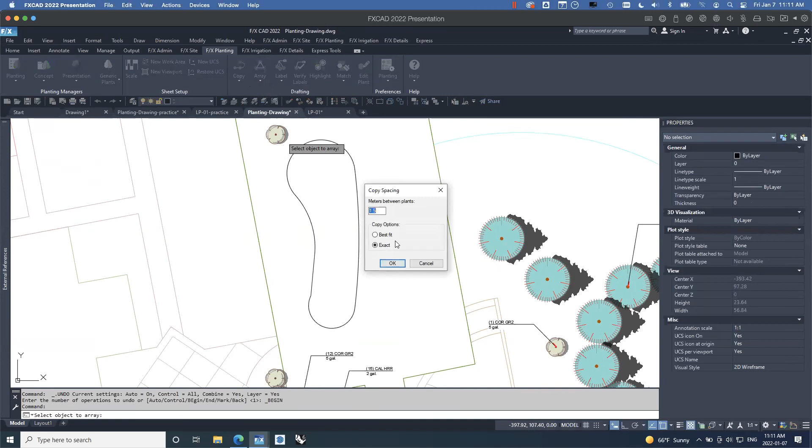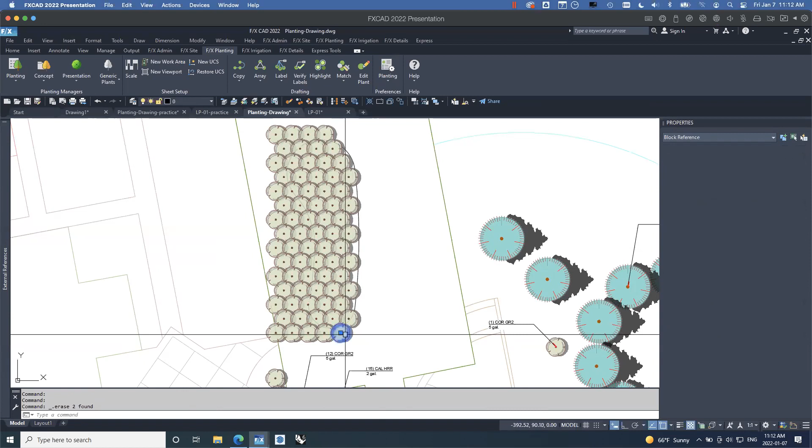That's the tricky part. I'm showing here we have some tools where you can array them out, but then you have to go through and get rid of some, and we didn't quite like that because you get this weird jagged line that doesn't totally fit the shape very well. We didn't really like that one, and then we've gone through with other ideas of how you can do this manually.

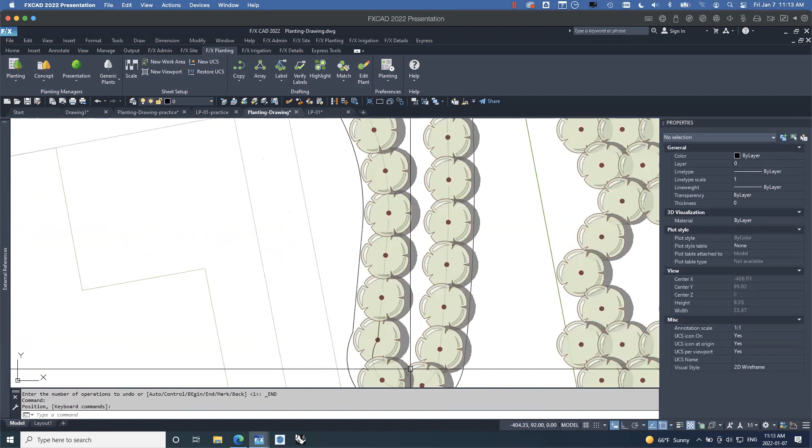Another method I liked was this: do an offset of about half the distance, snapping for simplicity's sake, and then use copy along a polyline. So I go to this point, use copy along a polyline, grab that, copy it all the way along like that. You can keep doing that, going in and in. You can already see the problem though, one thing we're trying to address, is you get this gap where it's not going to offset anymore.

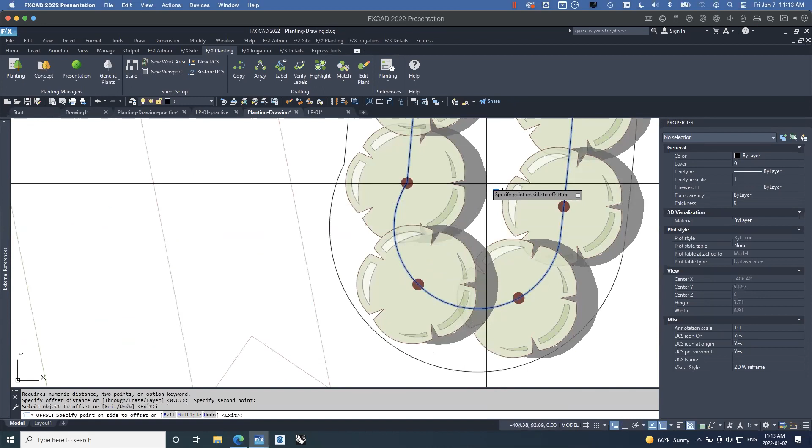So that's where we're figuring out where to go between manual and automated methods. If I go in here, you can see the funky offset that would come next, and we miss all the plants in here. So those are the two ways I would do that manually in the meantime until we work out that system.

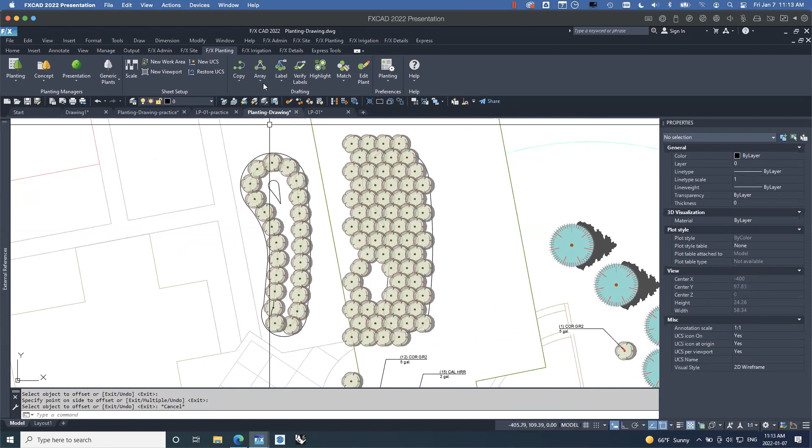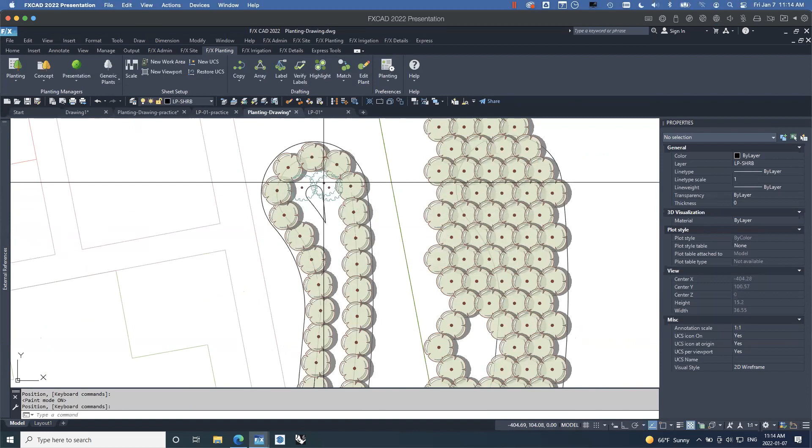Did you show paint at all? I didn't. Oh, that's true, you could totally do that. You can grab, let's do match plant, grab that plant. Oh, it defaulted to my last one, which was match plant properties, you can see the icon switch there. So I'll go here and pop that in about here. Those keyboard commands, T was for paint mode. So I'll tap the T key and kind of randomly fill them in. But you can also do that just within the outline and clean it up afterwards instead of array. That's another method.

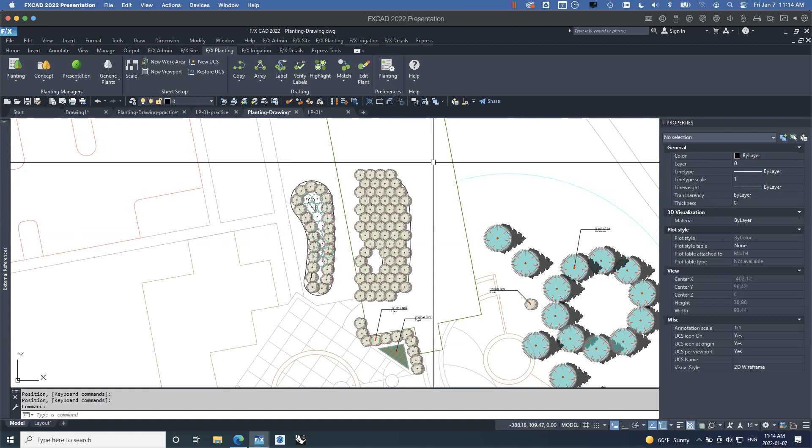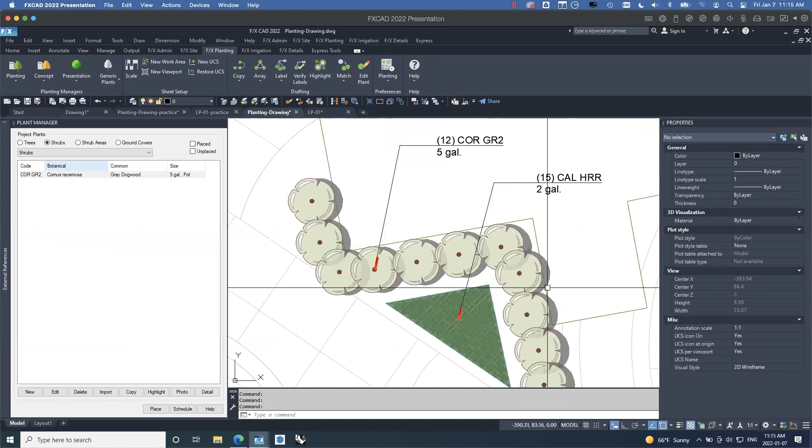There was a question: are grasses and perennials supposed to fit under ground covers? I think, again, you're not limited. That's a really good question, because grasses and perennials could easily fit in shrub areas or ground covers. It really depends on how you want to display them. Shrub areas has that nice little plotting outline, but ground covers has a non-plot outline, it doesn't have a line type, even if you make that line plottable. Whereas if you want to show the grasses and perennials as individual little symbols, you'd put that into shrubs. So that kind of plant group could be in any one of these categories depending on how you want to display them.